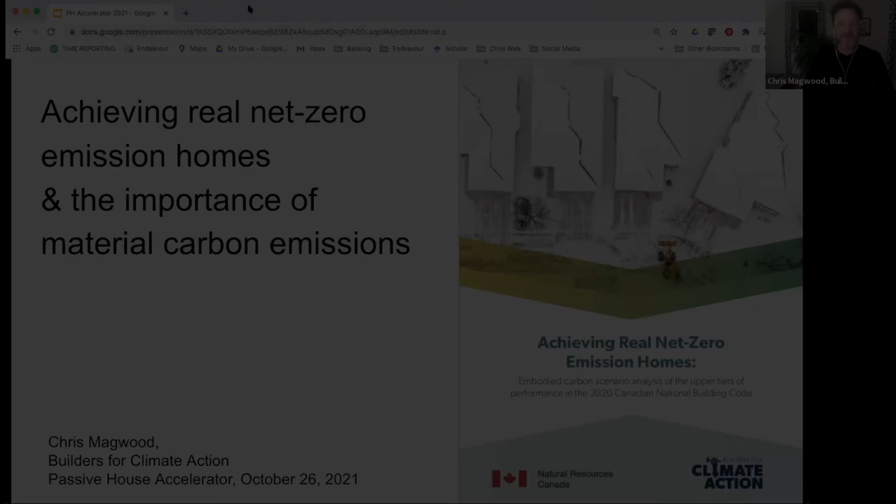Excited to talk to this group. I love what is happening at Passive House Accelerator, and really excited to be able to bring this piece to what everybody's trying to do, which is figure out buildings and climate and what we do and how we go forward, and keep building amazing buildings for people who need them, and not wrecking the planet as we do that, and maybe even helping rescue it a little bit.

This presentation, I warned people who came on earlier, you're getting a bit of a Frankenstein presentation in that I've patched pieces of different presentations together. I feel like this group has a very specific, already established knowledge base and some unique interests. So all the information is here. You'll just see the format change sometimes between slides, but hopefully everything is in a logical order that you're able to follow, and looking forward to a discussion at the end too.

One of the bases for this presentation is this report that I just helped author with Builders for Climate Action and Natural Resources Canada, which is the branch of the Canadian federal government responsible for home energy efficiency and all the programs that the federal government offers there. We did this study, Achieving Real Net Zero Emission Homes, and it was the first time a national government really took a dive into material emissions and tried to see what they mean for the country. It's the beginning steps of trying to figure out how this might fit into the regulatory world. So I was really excited to be part of it.

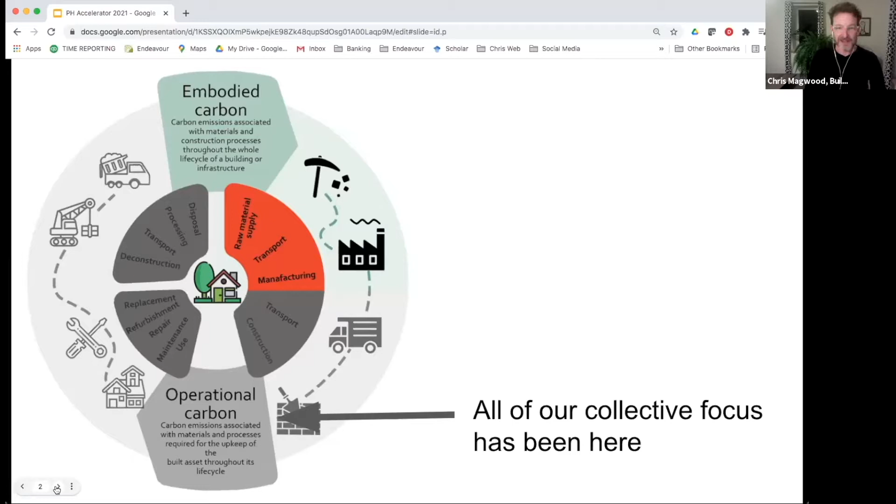Very brief background, because I think everybody knows the story by now, but all of us have been working super hard at figuring out how to eliminate or greatly reduce at least the operational emissions that come from buildings. Such an incredible focus over the last 20 years - if we really think back, when I built my first house, my building inspector laughed at me for wanting to put more than R12 in my walls. He just thought that was the most ridiculous thing he'd ever heard. Why would anybody do that willingly? It's been a long way from then till now, and we've all done really great work to really address that side of the emissions puzzle.

But what I've been looking at recently - honestly, my own dive into this came from about 10 years ago. I wanted to know what the carbon footprint of the building we were working on at the Endeavour Centre that year might be, out of just interest, hey, what does this look like? And that started me down a 10-year rabbit hole of trying to figure that out, mostly because when I first started, I couldn't figure it out because nobody seemed to know. Then my interest happened at the time that a lot of people got interested, and a really interesting body of knowledge has grown in that past decade.

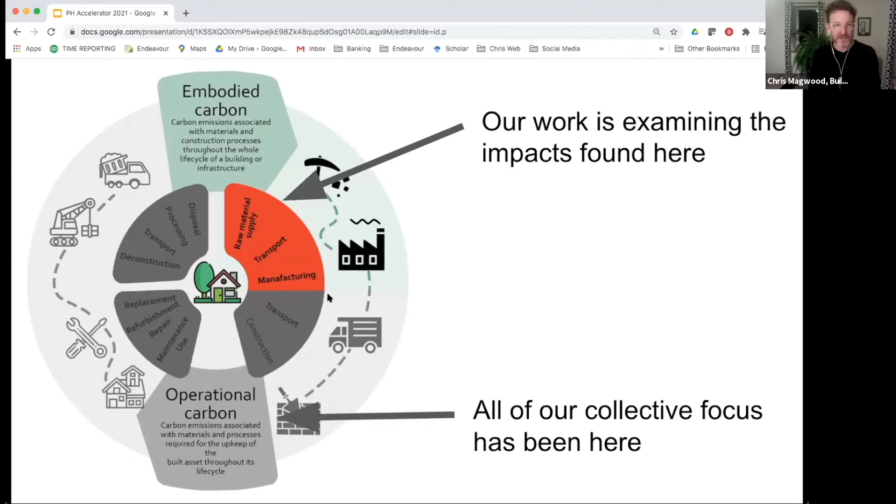But the specific thing I want to talk about is the material emissions, this red highlighted bit in a life cycle of a building and its materials. The reason I want to focus there is that product phase, or what people often call cradle to gate, is where the majority of the emissions from all the materials we use in buildings happen to occur. Depends on the material, but somewhere between 70 to 85% of the emissions that are going to happen over the entire life cycle of a product - from its initial raw material harvesting to when it's finally taken out of the building and incinerated or landfilled or whatever happens to it at the end of its life - almost everything happens up front here.

So when we're thinking about addressing the climate, today's emissions matter a lot, and here's where most of them lie, and this is where we can dive in and really address these. The other phases, in particular transportation to the construction site and construction site emissions, tend to be between 5-10% of the total life cycle - so not as big as most people think, but not insubstantial either.

It's hard to address that broadly, because where you are, where materials are coming from, how you're getting to the site, what kind of energy you're using on the site, all of those things are very particular and unique. Whereas material emissions, most of these things are built in factories, and it's very easy to assess what's going on there. So we know the emissions we're recording and understanding here are quite rigorous and understandable.

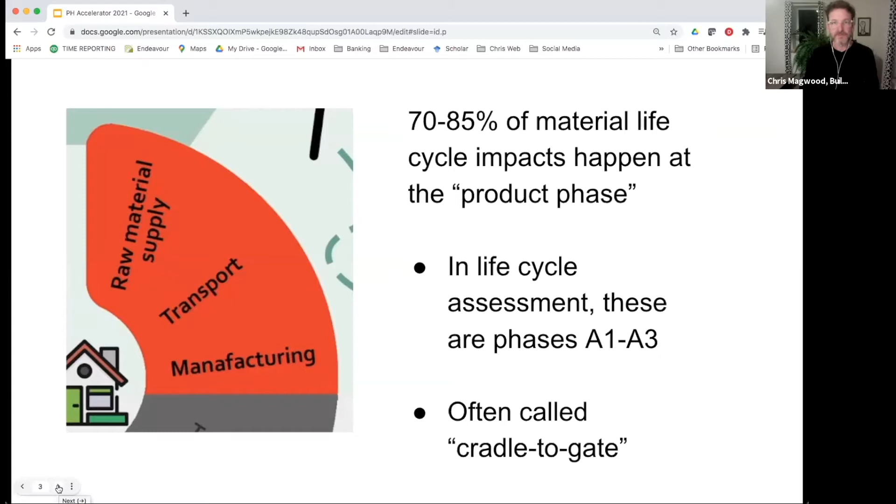We get the data driving these studies from documents called environmental product declarations, or EPDs. That's an internationally standardized way of reporting on a bunch of different environmental impacts from, in this case, building materials, but the methodology is actually used for all kinds of products.

Each product has a category that it falls into, so you don't necessarily use the same rules for, say, framing lumber as you do for flooring. Within each product category, there's a set of rules. But basically, an EPD makes sure that everybody's counting the same kinds of things in the same way according to the same methodology, so we get a pretty comparable look between products in the same category.

So I take the global warming potential that they report in an EPD and figure out what that means for the amount of material in a particular building.

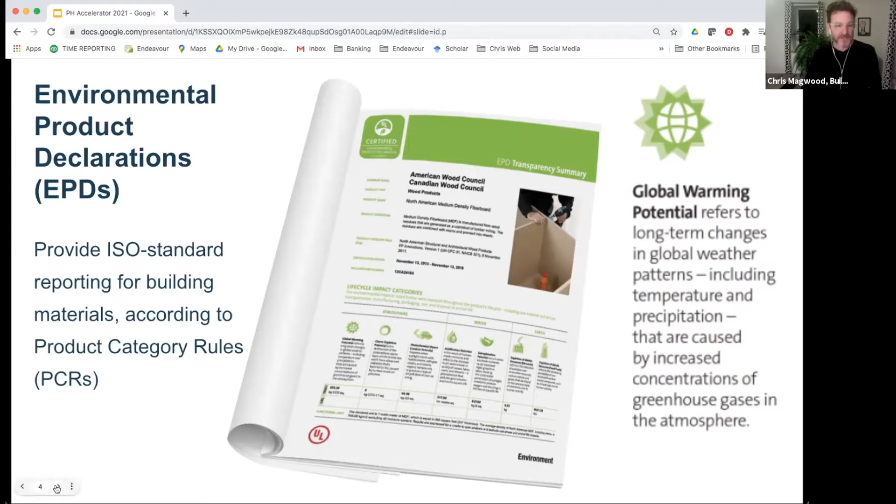First, for my own purposes, I started to build out a spreadsheet of all of these EPDs, wanting to model my own buildings and some research buildings I was doing. I kind of built a half-assed spreadsheet that gave me the answer, but if anybody else looked at it, they wouldn't have known what was going on. But that has been refined over time.

We built a version of it for Natural Resources Canada, which they call the MCE squared tool. We also have a version of it called Beam. Both of them are going to be out in public before the end of this year, so I'm excited to have that tool get out into the public.

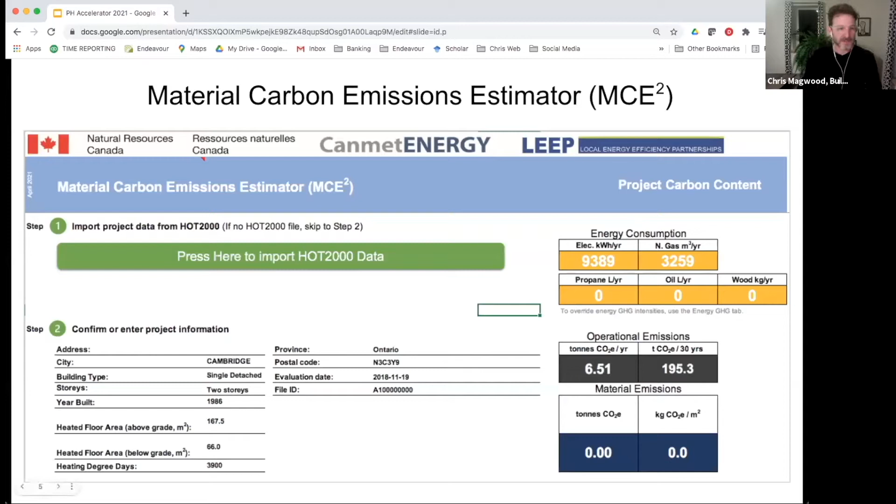You probably can't see this on the screen, but essentially each tab on the spreadsheet is a different part of the building. This is a snapshot from the exterior walls, where we've told the software how much wall area we have. We've given it an R value.

What I really like about how we built the tool out is that right away you see a comparison for the building you're working on of the carbon footprint of all the different materials. So I can look and see, oh, fiberglass would give me this in this building, blown-in fiberglass that, mineral wool this, cellulose that. It's this really great tool where you get to compare the actual results for your building right away, so you can decide on making material decisions and material swaps by seeing the carbon footprint in kind of real time.

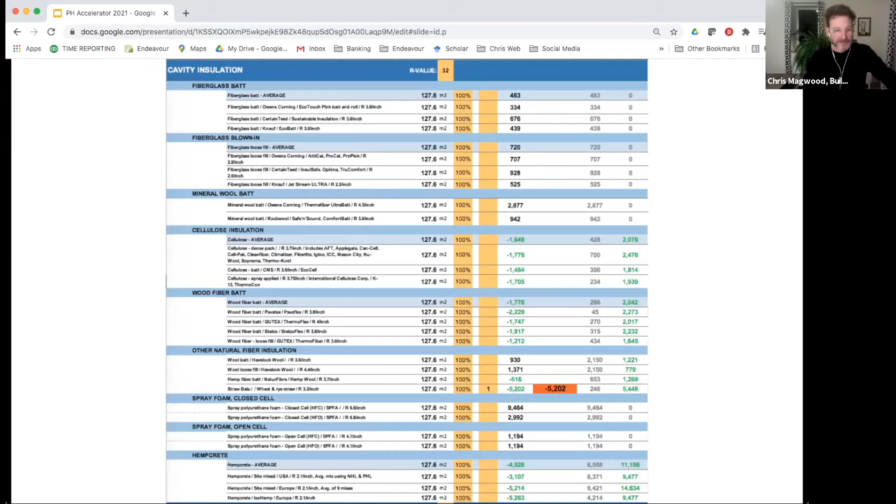So that tool is behind this NRCan study that we just did. And the study looked at, it's not based on real homes, it's based on archetypes.

NRCan has a bungalow, a two-story, and a row house that they have plans for, that they use as the typical single-family homes in the country. They gave us HOT 2000 energy models for these archetypes at tiers 3, 4, and 5 of the National Building Code, 5 being the most energy efficient. It's kind of like the net zero ready version of the code.

And they gave us models for 5 cities across the country: Vancouver, Prince Albert Saskatchewan, Toronto, Quebec City, and Halifax Nova Scotia. And then we built up 4 material scenarios for each of those models.

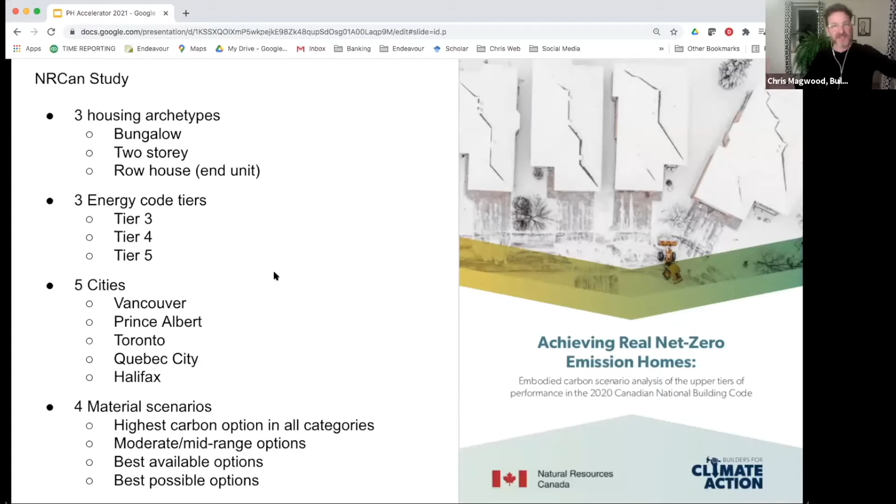One where we picked the highest carbon option in every material category. One where we picked pretty typical selections from the mid-range of the options available. One where we picked the best material, meaning the lowest carbon footprint, but one that is widely available and code compliant across the country. And then a final model where we just picked the best option, whether it was a typical material or code approved or not, so that we were bookending the study with a worst case and a best case scenario, and showing a bit of what is possible in the middle.

And so this part, you're all going to get how this part works.

So I'm looking at the 2-story house from Toronto here, but things mapped out pretty similarly across all of them. Tier 3 is kind of our building code norm right now, so it's like a code compliant home built today, heated and the hot water done by gas.

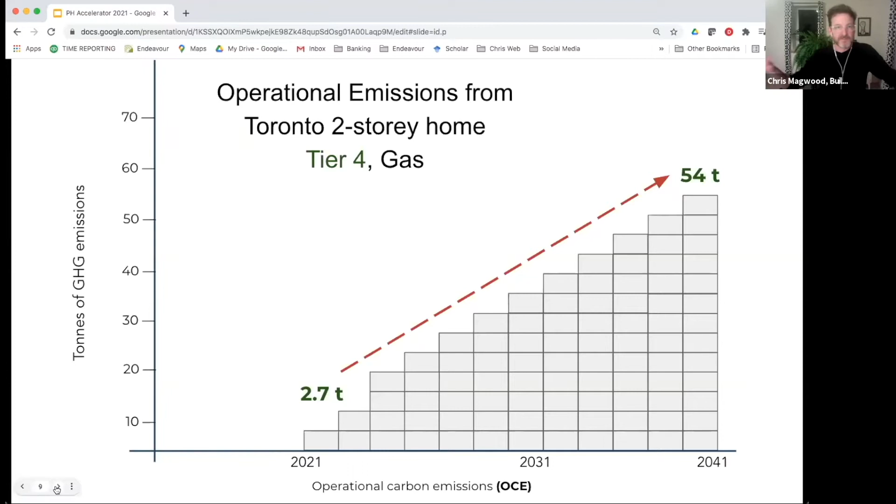That building from the HOT 2000 model has about 3.5 tons of emissions per year, or 70 tons over 20 years. That's probably about what you'd expect from something in this climate. If we bump that house up to tier 4 and it's still on gas, we dropped 20 tons of emissions over those 20 years, down to 2.7 per year. So clearly moving buildings along the energy tiers does what you'd expect it to do.

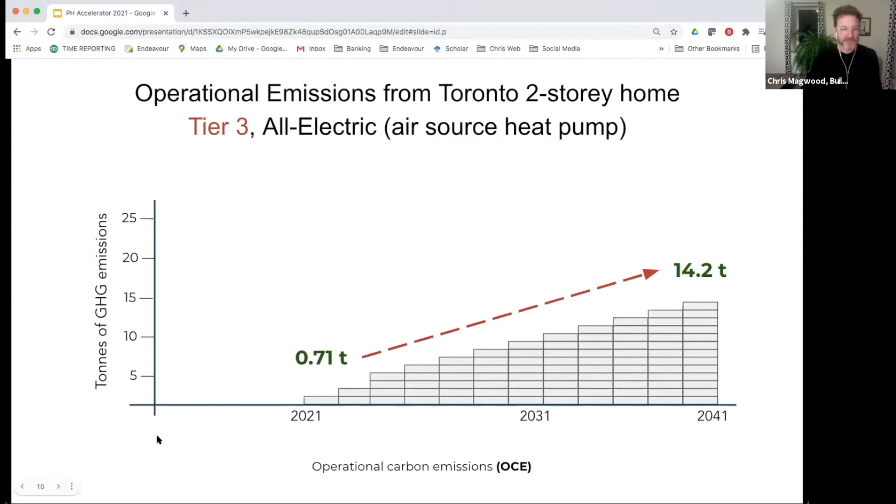The tier 3 model, if we change it to all electric, so an air source heat pump doing the home heating and an electric resistance heater for the hot water tank - even at tier 3, the operational emissions have dropped to under a ton per year, 14 tons for the 20 years. So there's a big difference between using a fossil fuel and using relatively clean electricity here in Ontario. If we bump that electric house along to tier 5, we've got it down to under 0.5 ton per year, just under 9 tons for the 20 years.

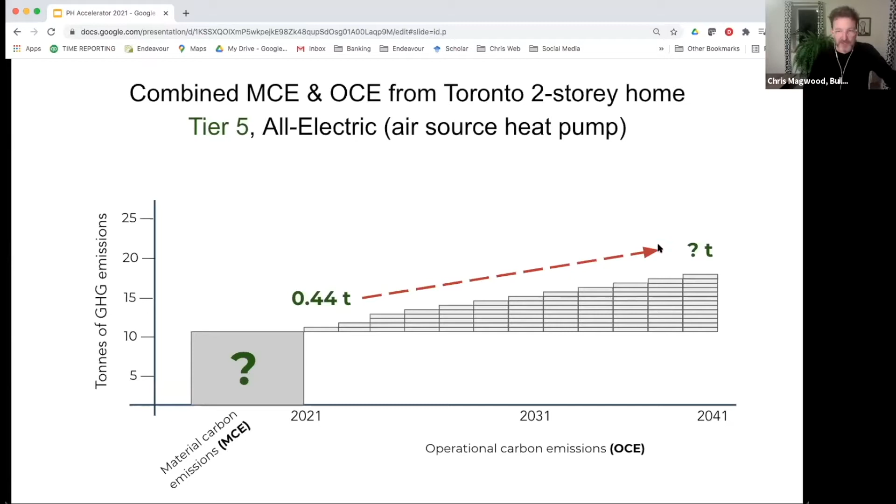So all of that is not news to you, you all know that's kind of how things go. What we're trying to provide in this study is what is this end number after 20 years if we add the materials to it, right? Because the operational side isn't the only carbon footprint that building is going to have - its materials also have one, and we don't know that answer until we know this answer.

So in the study, this is what we found. If we pick the worst materials in their category, and these are not uncommon materials - this includes things like brick cladding, XPS insulation under the slab and around the basement, spray foam insulation in the walls, not unusual materials. This model's maybe unusual in that we put them all in one building, but you can see what happens.

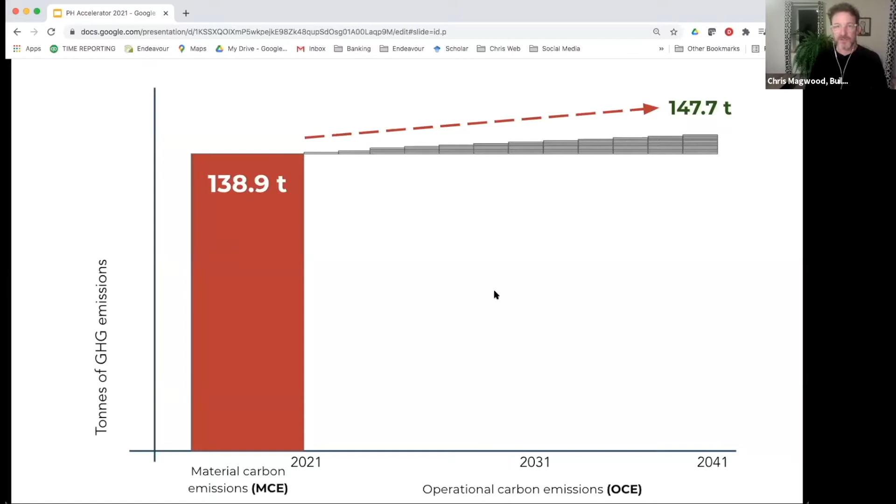The carbon footprint of just the materials absolutely dwarfs the operational emissions. The vast majority of the emissions lie here. The material emissions for this one are equivalent to 315 years of operating emissions. So if we're going to make a difference in this building, we're going to make the difference in the materials and not anymore in the operations side.

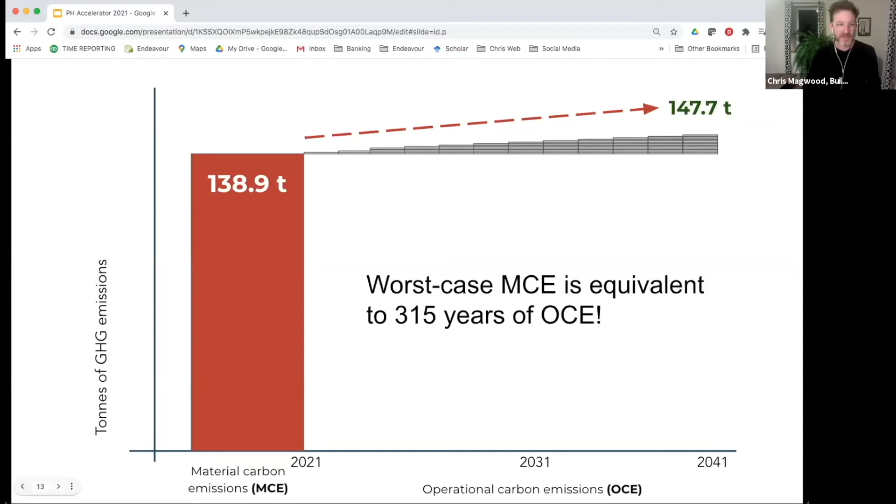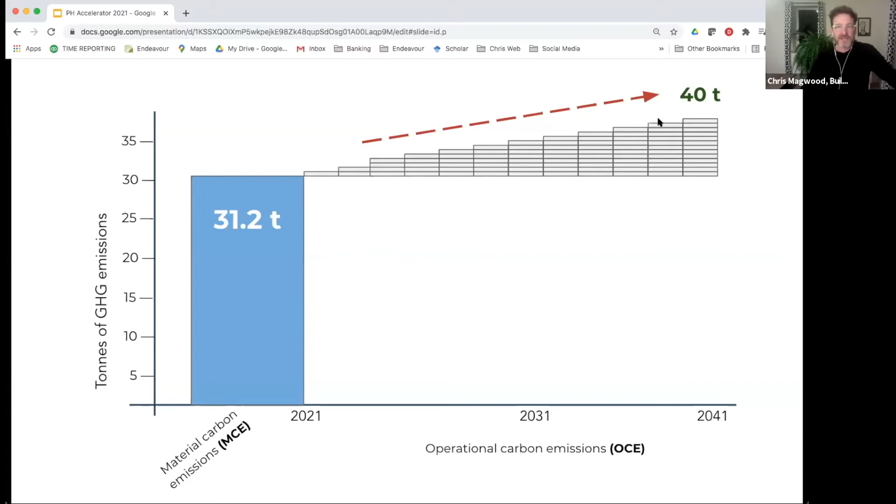Here you'll notice the scale has changed a bit - I had to adjust it to fit that last model in. Our more moderate materials example is 31 tons of material emissions, taking the building to 40 tons over the 20 years. This is a much lower material emission than the other one by a substantial amount, but it's still equivalent to over 70 years of operating emissions. So even when we get into a more moderate material palette, the materials are still the dominant part of the emissions profile, well past when we have to care about things for the climate.

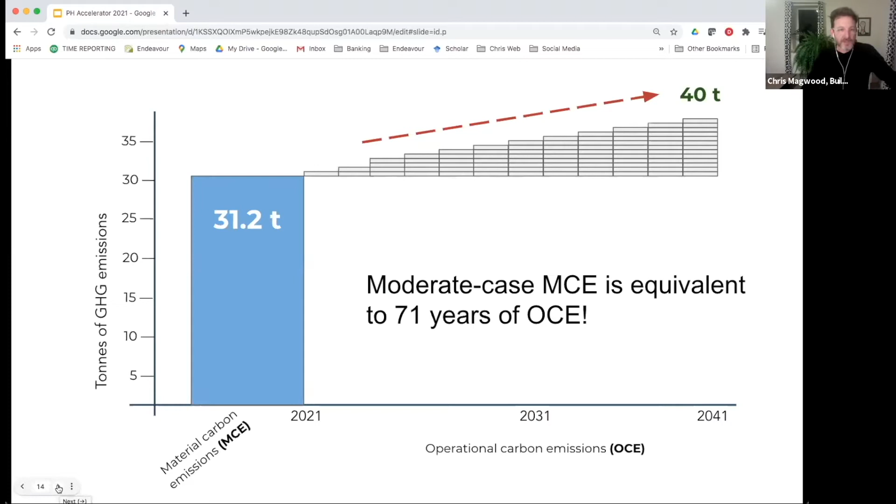You know, 70 years is not the time when we want to start seeing paybacks on carbon footprint. So the moderate version still leaves a lot to be desired in terms of meeting climate goals.

So the third model starts to look different and quite positive. This is the first model in the study that has a net carbon storage, and this was achieved pretty simply. The main things we changed in this model were the cavity and roof insulation were cellulose, the exterior continuous insulation was wood fiberboard, and the concrete was the best mix we could specify for the Toronto region for this project.

Pretty much that's the deal that pushes this model from having a pretty substantial carbon footprint to being a net carbon storer. So you can see what happens if we start the building in a position of net carbon storage with a minus number - it operates for 20 years and it's still a net storer of carbon. I think that's the reason we titled the report 'Achieving Real Net Zero Carbon Buildings' - it's only a net zero carbon building if, when you add both of these things up together, the materials and the operation, it's at zero.

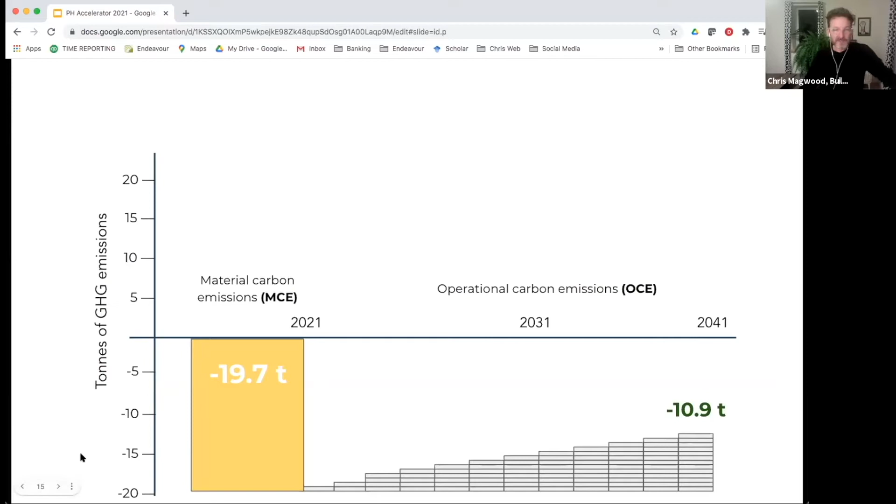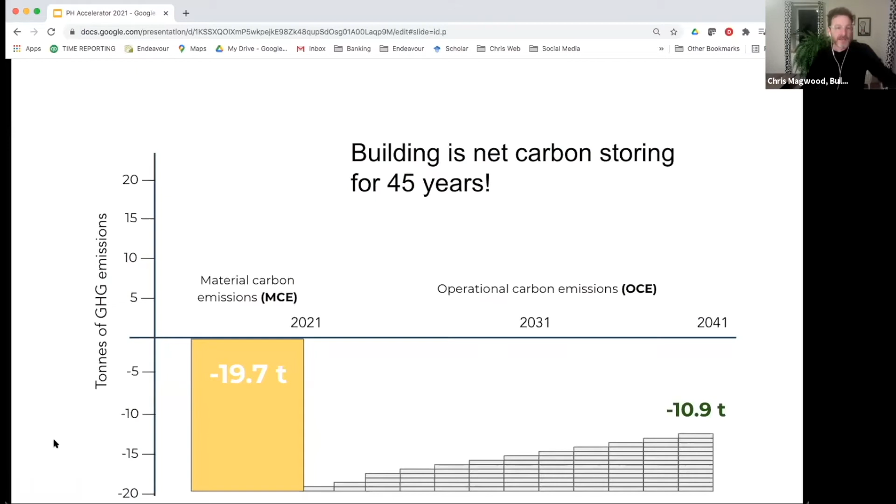If we can get there, then that's where we need to be. And this is a pretty achievable model of a residential building to be able to get there. So that's going to extend out for 45 years. This building won't have a net carbon footprint for the next 45 years, which is pretty much what we need to do. It's pretty great to see that it is doable. Again, this model had all materials that you can go get your hands on and use pretty easily today.

And then this is sort of the more ambitious model. This is using materials that maybe aren't so common. We know that they're doable because that's what I do in my day job, is make buildings like this. But so this has things like straw bale walls instead of cellulose walls, pressure treated wood foundation, and things like linoleum and cork flooring in it. We sort of threw as much carbon storing material as we could at this building.

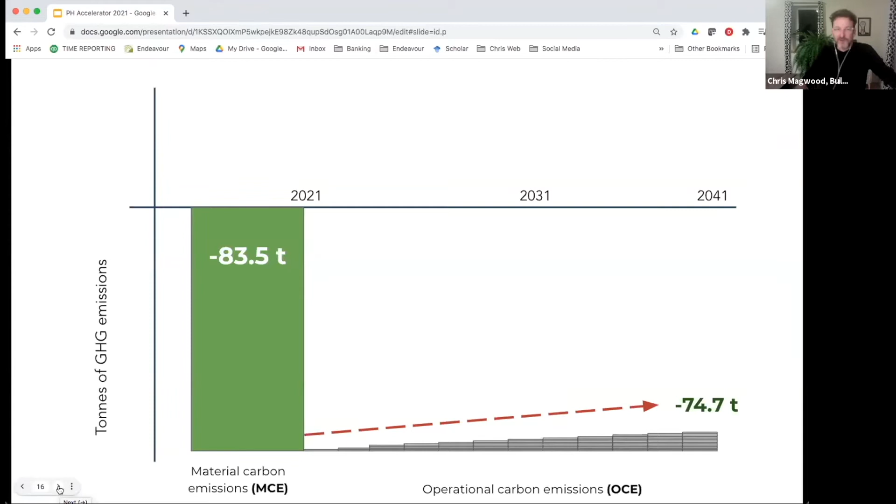And you can see what happens here is, the amount of carbon storage is actually really substantial. A building like this actually starts to be a noticeable kind of reverser of climate change, not just a zero. So this building is going to stay net carbon storing for almost 200 years, well past my life, my daughter's life, and whatever children she has, their life, and maybe beyond that too. So I think if we want to be building in a way that we can really look to future generations and say, yep, we did what we could to help you have a climate that you can live with, this is where we need to be aiming our practice.

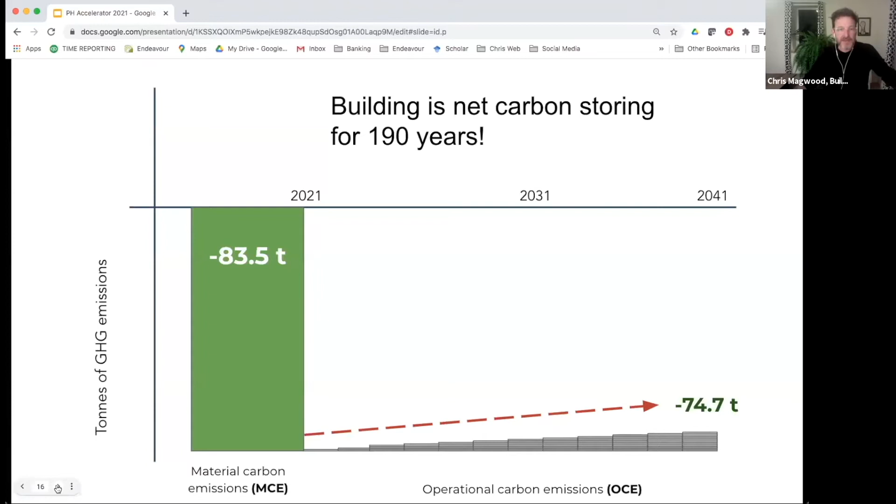So this is just those models, put together so you can kind of see the extent. Essentially we built the exact same home. It's got the same number of rooms, the same level of energy efficiency, the same number of doors and windows, functionally and operationally the same building, but its carbon footprint can fit anywhere in this really, really wide range.

And so, I think there's a way to sort of look at this literally as a series of steps. Like if I'm here, then I need to get here, and then here, and then here, and then here. We don't have to just all get to the green right away. There's a way to sort of progress ourselves there, and each one of these steps is really substantial. This blue model is less than half the carbon footprint of the red, and the yellow is less than half of the blue, et cetera.

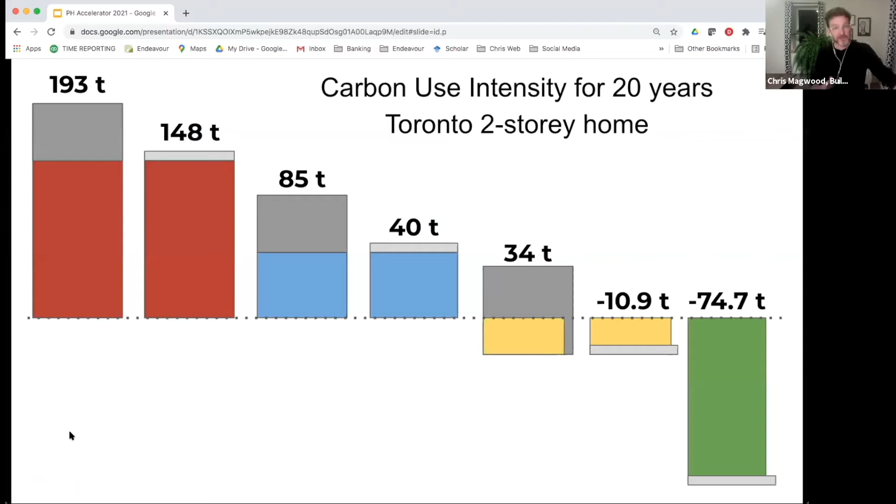These are big steps. We could break them up into smaller steps as well. So I think figuring out where you are on that progression, and then figuring out just how to get yourself to the next step first, and then the next step, is a pretty good way to look at that.

So I'm going to switch up a little bit and just talk about that carbon storage in buildings, because sometimes it took me a while to wrap my head around that, and I know that happens a lot for people kind of hearing this for the first time.

So the way all of the materials in this study that had carbon storage are plant-based materials. There also can be carbon storage in minerals, but none of that technology is really at hand right now. Hopefully it will become soon. Things like concrete aggregate gravel made from CO2 that's pulled out of the smokestacks of cement factories - things like that are happening now and starting to be scaled up. But right now, if we want to put captured carbon dioxide in buildings, it's going to be plant-based.

So plants absorb CO2 as they grow. That's what they do. The carbon stays in the plant and becomes part of the body of the plant, and the oxygen comes back out for us to breathe, which is a really great byproduct.

And literally billions and billions of tons of carbon come out of the atmosphere every year this way. Just grain straw alone is 4 billion tons of captured carbon dioxide annually. That's the emissions of India, the third or fourth biggest emitter on the planet, completely taken out of the atmosphere just by grain straw every year. But then we burn that grain straw, or we let it rot, or in some way that carbon goes back to the atmosphere and we lose it again.

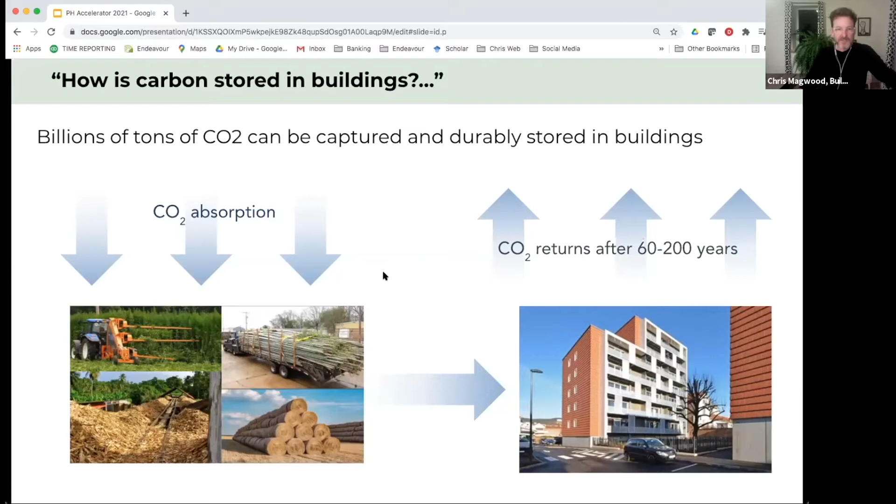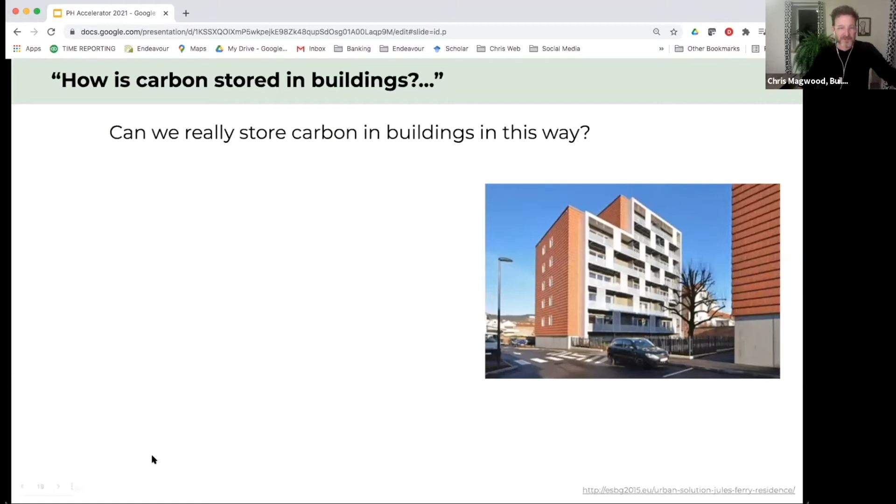You may be wondering, that was a weird building choice, Chris Magwood. Why did you put a picture of that building here to talk about carbon storage? I picked that one especially because it's a very large straw bale building—a 7-story apartment building in France, mass timber frame, with prefab straw bale wall panel enclosure around the outside. Probably the biggest carbon storing building on the planet.

Pretty cool. We can do this right now, today. This thing has a monstrous amount of carbon storage in it. And it's things like this that we're going to have to do if we really want to drive towards that best-case green building model.

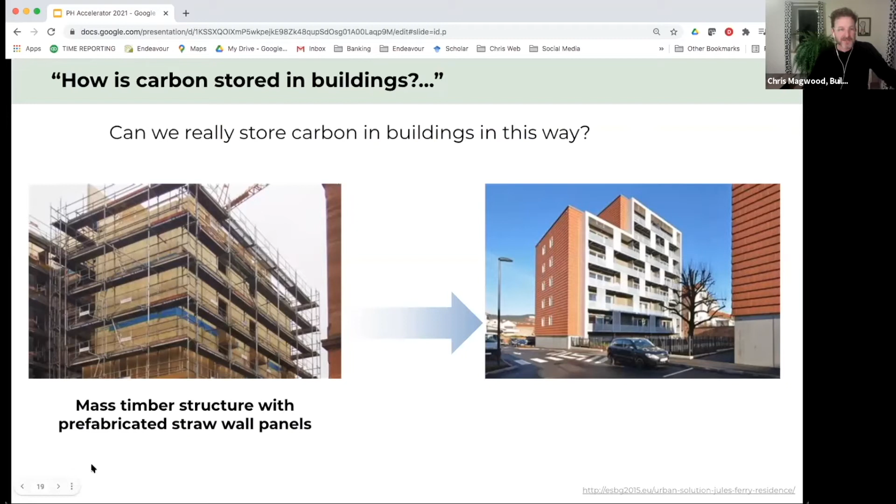Some places that we've done that store carbon: there's a little straw bale residence, there's a hempcrete and hemp batt insulation institutional building at Trent University, and there's a very large straw bale school also in France. So we're not pipe dreaming here—this is possible. I'm using straw examples because that's the world I'm from, but people are doing this with bamboo, rice hulls, and agricultural residues of all kinds. These are the kinds of buildings that would exemplify that green typology of net carbon storage.

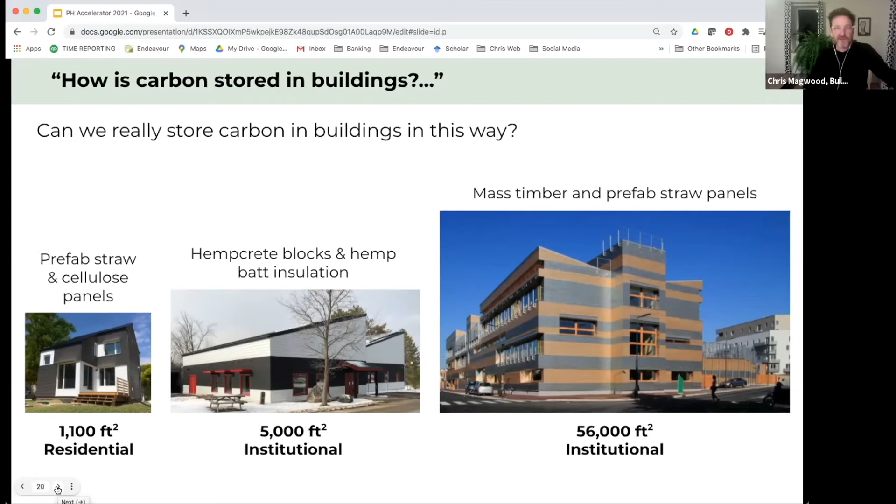Because you're a technical bunch, I thought I'd get into the technicalities of carbon storage. This has been an interesting ride for me—I'm not a climate scientist, I'm not really a scientist of any kind, I'm a builder. So wrapping my head around it, I could get that carbon comes from the atmosphere, goes into the plant, stays in the building. Okay, great. But what does that actually mean for the climate? Luckily, climate scientists have thought about this and figured it out.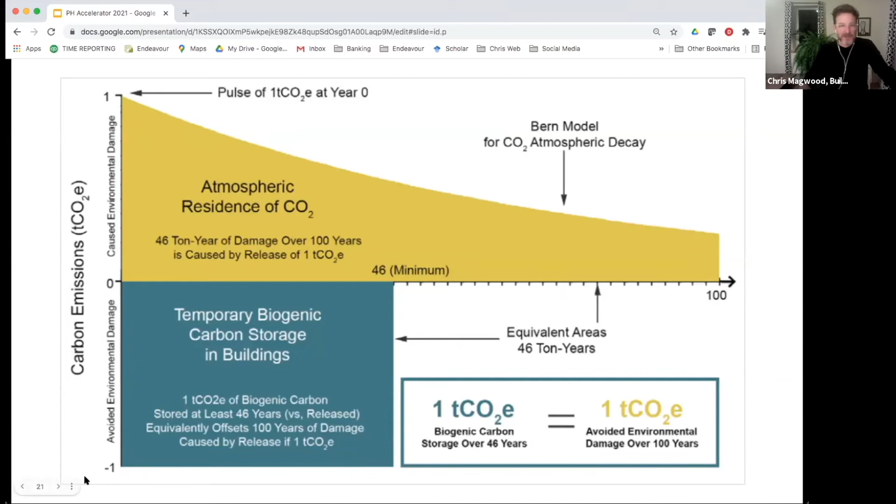The stuff that's going to hang out in a building for 46 years seems to be the magic number, but you can call it 40 or 50 or somewhere in that range. And then we can also use ton-year accounting to weight the value of that carbon storage if it's there for less or more time than 40 years.

So if I put 100 tons in a building and it's only there for 1 year, then its offset value is 1/46 of its weight in carbon. If it's there for 20 years, it's almost half the amount. If it's there for the 46 years, my 100 tons in the building literally has offset 100 tons. If it's there for longer, it's actually offset more than 100 tons. It's done more work because it's been out of the atmosphere longer.

So built into the tool that we built is that logic. If a product has a 30-year lifespan, then I'm using the 30-year storage value. If it's got a 50-year lifespan, I'm using the 50-year value. So we can fine tune the meaning of that carbon storage using that ton-year accounting.

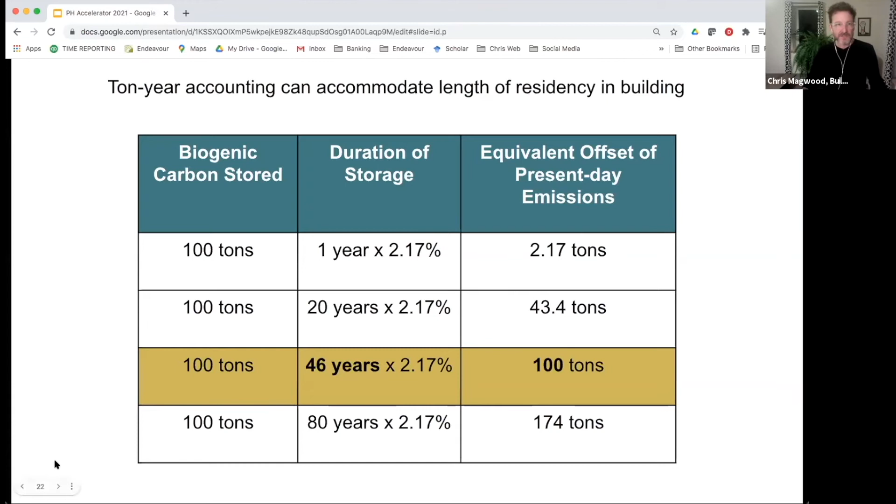So I'm working right now with my colleagues on a study for the Toronto region. With Passive Buildings Canada, sponsored by the Atmospheric Fund, we're doing case studies of 100 recently built homes in the Toronto region. It's the first time that somebody's benchmarked that many homes.

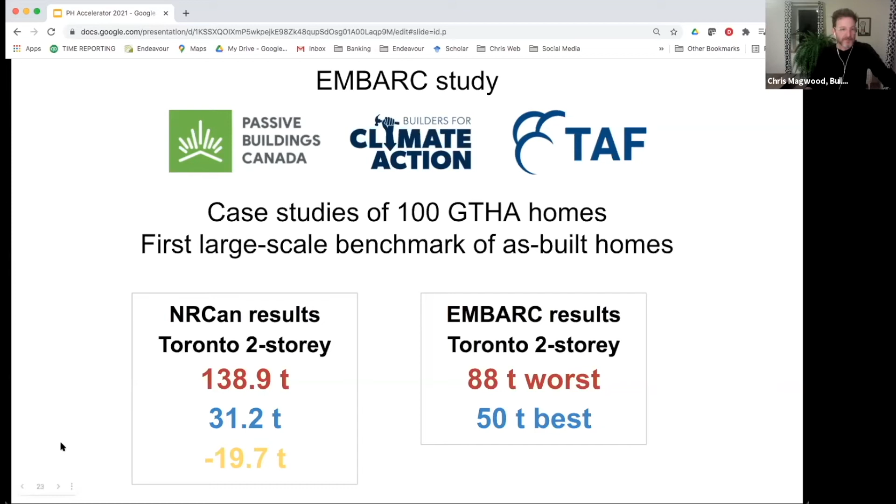We'll have that study out first thing in the new year, so I'll make sure that I send it everybody's way so that it gets seen.

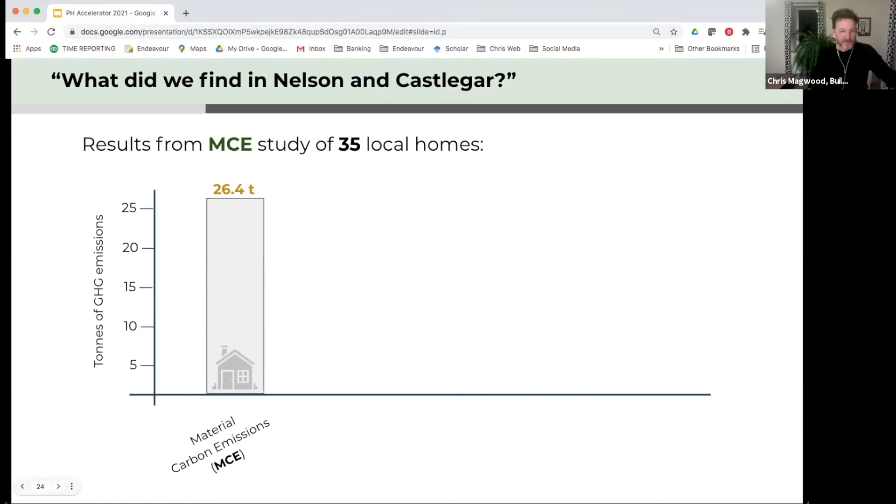We also just finished a study for the cities of Nelson and Castlegar in BC. We did 35 homes there, and again these are actual as-built examples. There we found that the average house was 26 tons, again bracketed quite widely, with 63 as the highest result and 5.9 as the best result. So the average looks good compared to the other study, but again there's this wide range that they fall in.

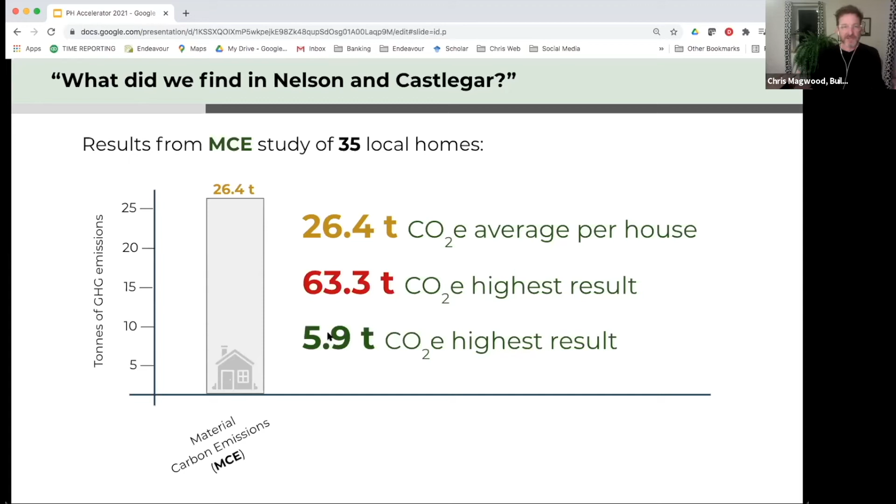It's super important to know that in the same region, within the same couple of years, people buying materials from the same store can turn out a 63-ton house or a 6-ton house, and it had nothing to do with its level of energy efficiency—it really comes down to material selection.

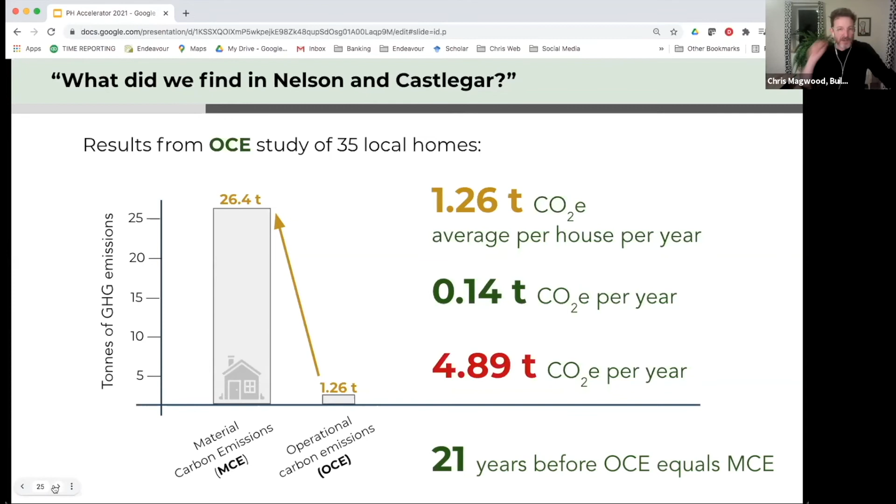So that's how it broke down in Nelson, and it's pretty similar to how it looks in Toronto, and likely across North America. The one that changes a lot is cladding. Places that use a lot of brick tend to be higher. Places that use more wood and vinyl tend to be lower, but this kind of breakdown is pretty typical.

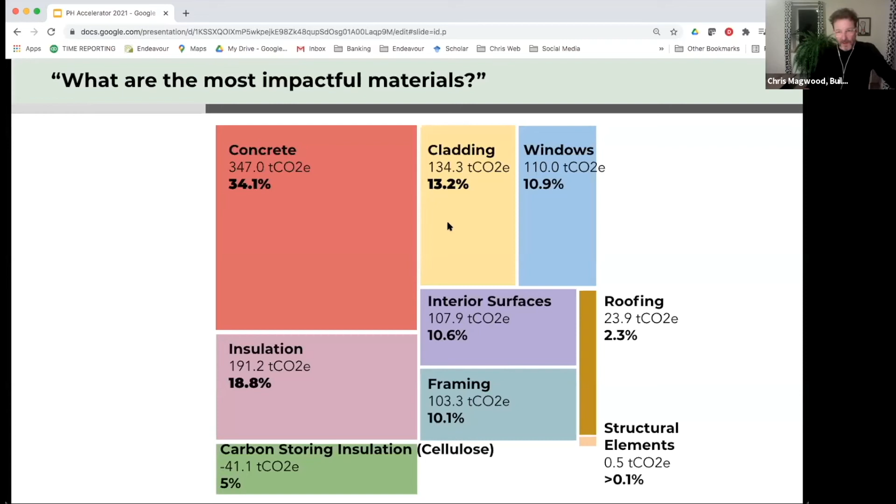One thing we did for the builders in Nelson was we took the house with the worst results and looked for the low-hanging fruit where we could make a big difference in the carbon footprint with just a small number of changes. So we took the average concrete from that building and subbed in results for a high SCM concrete, something with a lot of slag or fly ash in it, and also a Portland limestone cement.

We changed the foam ICFs for wood chip ICFs. We changed the mineral wool wall insulation for cellulose. We changed the XPS continuous insulation that building had for wood fiberboard on the outside. It had hardwood floors throughout, so we changed half of those to linoleum, and we put cellulose in the roof instead of mineral wool, and we halved the carbon footprint of that building.

So 6 relatively straightforward steps, nothing too difficult to achieve. In a lot of cases, not necessarily even any more expensive, and we cut the carbon footprint of that building in half. We haven't addressed the design of the building or anything, just these 6 material interventions. Then we decided to pick 6 more where we could take it a little further.

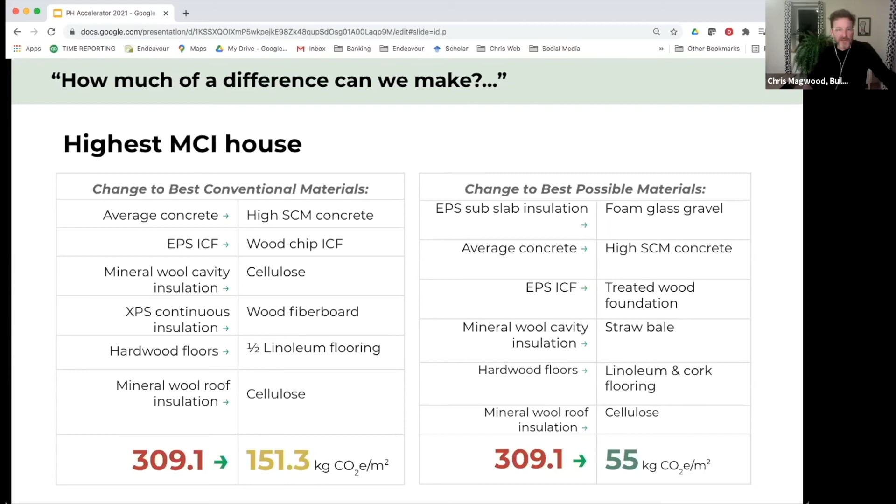And then in that Nelson study, this house came to our attention after we had run the study, but the energy advisor who was helping us out there said, 'Hey, I think I've got a pretty interesting little building.' I ran it through the calculator just because I was curious, and it has 2 kilograms of CO2 per meter squared. So essentially a zero carbon house on the material side.

The biggest things that contributed to that were: it had no concrete in the foundation, it's up on helical piers. That allowed it to have cellulose in the floor instead of any kind of foam in the slab. Cellulose wall insulation, wood cladding, and cellulose roof insulation. Not terribly radical as far as the building goes, but a radical change from the average of that study in the 150 range down to basically a zero carbon building.

It was great in that study to be able to talk to the builders and other folks in those two municipalities and say, this is actually going on in your jurisdiction right now. You could be building this, everybody could be building this. You don't necessarily have to build it this way with these materials, but these kinds of results in terms of carbon footprint are achievable. It's not a pipe dream.

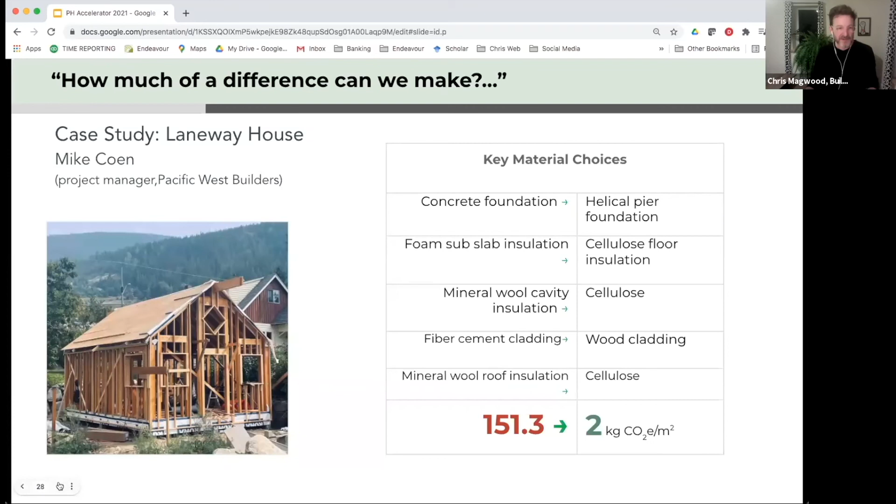So I wanted to dive a little bit into concrete because it does end up in most residential buildings being a pretty significant portion of the carbon footprint. Obviously, there's things you can do like not use it or reduce how much you're using. So by sheer volume, you can make a difference.

Asking your suppliers just to know the carbon footprint of your concrete is really helpful. And second, pushing them to start offering lower carbon mixes.

When I look at the concrete EPDs available across North America, I can see there's a best achievable of only 136 kilograms of emissions per cubic meter of concrete, and about 20% of the EPDs are above 650 kilograms per cubic meter. That's a big split. When you get to site and it's coming out of the spout, it just looks like concrete, there's no performance difference. This is for the same PSI, the same basic residential mix that anybody would use, but there's this giant gap.

For our studies, we're using this Canadian average of 369 kilograms per cubic meter. But by and large, we don't even know what people are using, because most ready mix plants that are supplying residential buildings aren't producing EPDs.

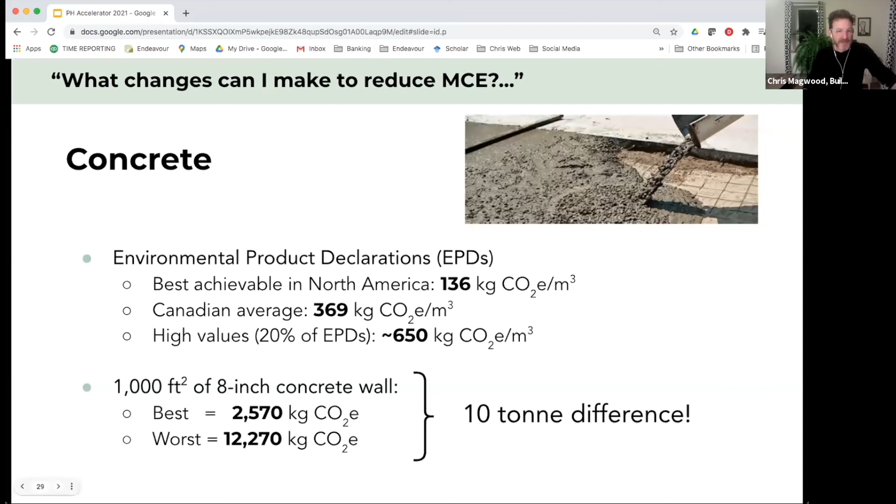The difference here is if we use the best number, the same wall, like 1,000 square feet of 8-inch wall, could have 2.5 tons of emissions or over 12 tons of emissions. So it's a 10-ton difference. It's still a concrete wall. If you looked at it, if you built a house on it, you would not know there's any difference, but the climate feels that kind of 10 tons per house difference. So everything we can do to make sure we're bending that down is really great.

For Nelson, we did this little wall systems comparison. We just looked at some of the ones that were quite common across the houses we studied there. You can see, basically, we tried to normalize this so that all of these are achieving an R24 level of performance.

You can get anything from 9 tons of emissions in the worst case to 5 tons of storage in the best case, and kind of everything in between. So thinking about how we pick those materials, what goes into the assembly, is really important.

I know there's a lot of people, I get more email about this than anything else. Yeah, there's this new XPS formula coming out, it's a real game changer. It's kind of a game changer. It changes XPS from being shockingly by far the worst insulation to being just the worst by a little bit. So it's not going to change the world, but it is a pretty significant improvement. It makes it about the same as doing mineral wool cavity and mineral wool board on the outside. Glad that's happening, but it's not the silver bullet it's sometimes made out to be.

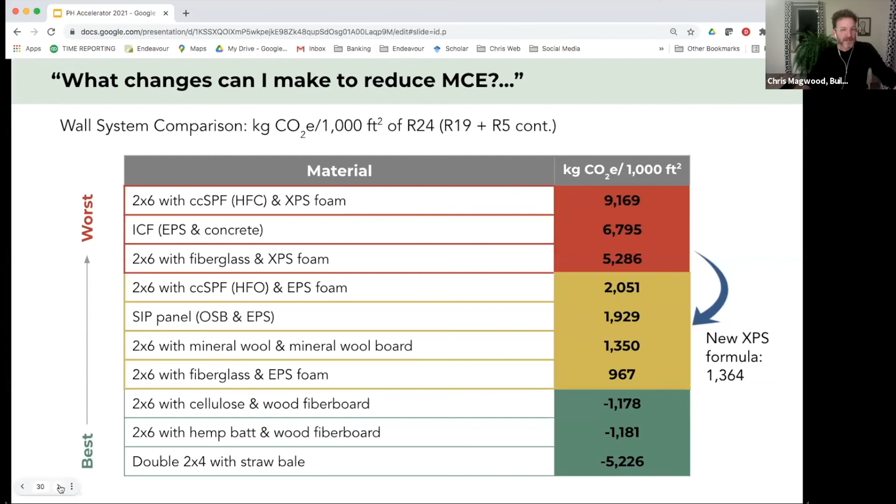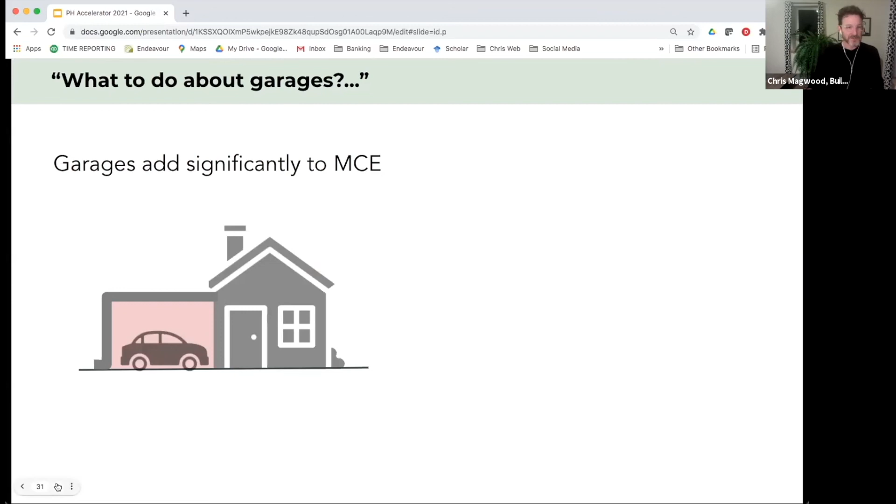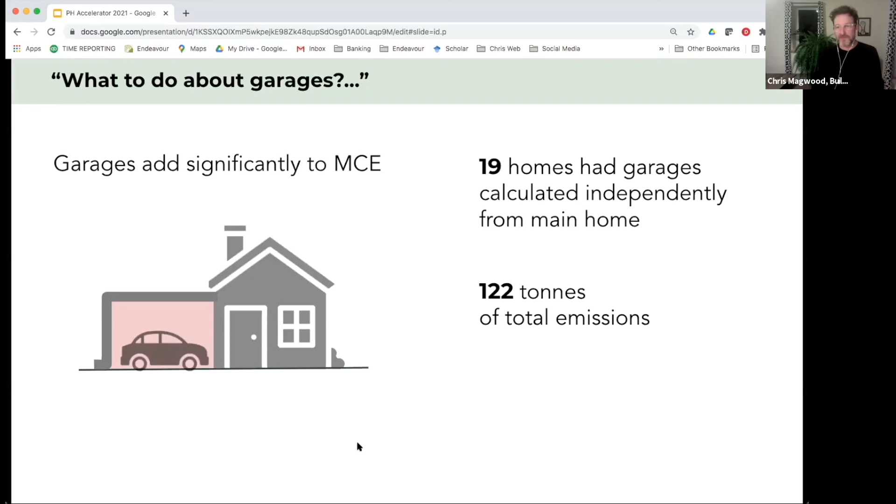This was interesting, I hadn't really thought about this because in my practice I don't really build houses for cars, but a lot of people do. So 19 of the 35 homes in Nelson had garages, and they had 122 tons of emissions just from the materials that go into the garage. So basically 20% of the emissions from houses that had garages were attributable to the garage. So if you want to cut the carbon footprint of your building down, don't make a building for a car. You can knock a fifth off your total right there. Don't do anything else, just don't make a house for a car.

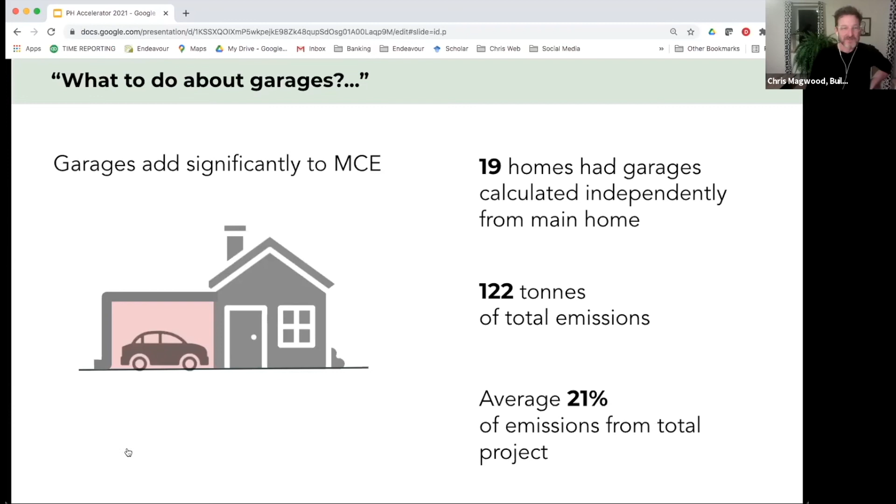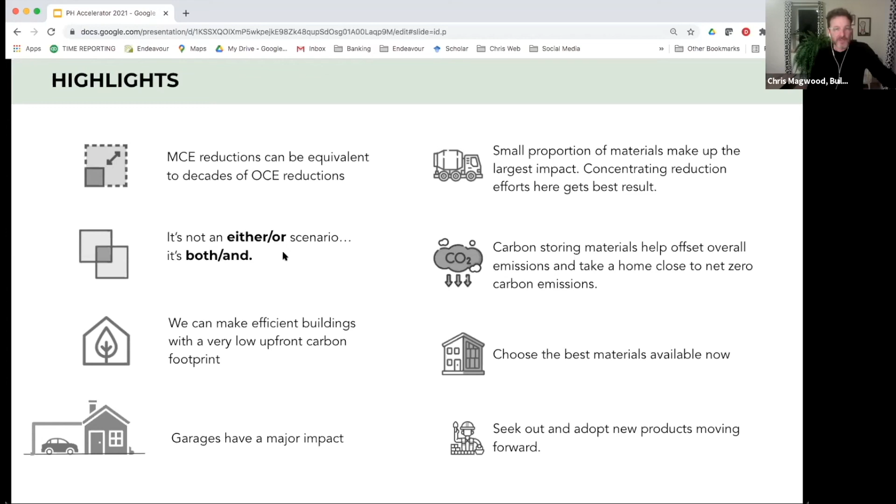I'll go through this quickly, these are the takeaway points for the group in Nelson. I really want to make sure people look at the first two here. Even though I'm saying material emissions are a lot bigger than operating emissions, I am not at all suggesting that we give up on operational emissions and only think about materials. I really think these two things need to go hand in hand. The kind of results where you actually get a real zero carbon building, it really has to be net zero on the operational side, and zero on the materials side. You can't just put all your attention in one place or the other. We really have to be doing these things hand in hand, and thinking about them holistically that way.